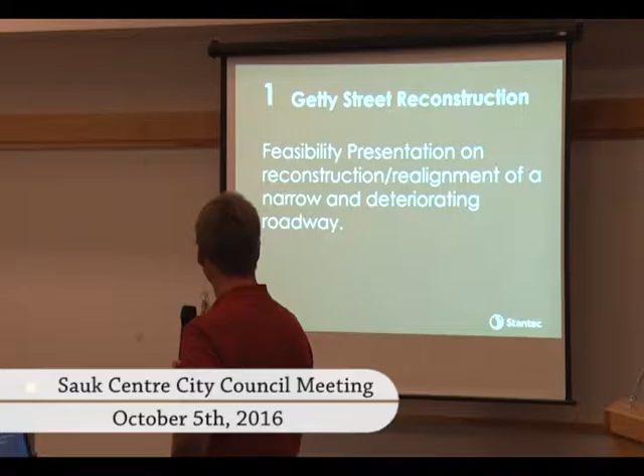This is for the Getty Street reconstruction. Purpose of this, a feasibility presentation for the reconstruction and realignment of currently a very narrow and deteriorating roadway. And as you all know, there is development potential that we think is fairly imminent that's going to occur in that area.

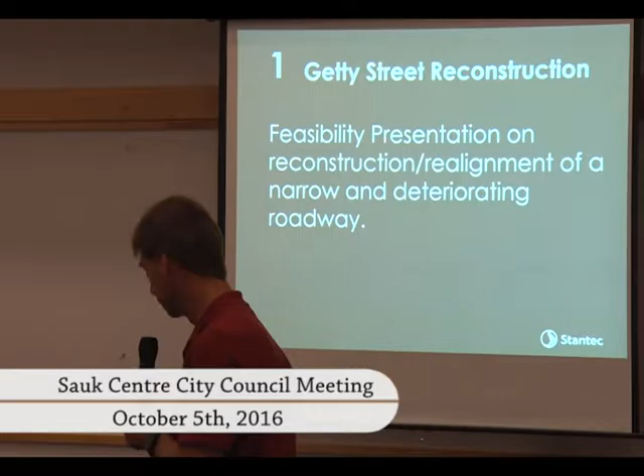You'll notice a very narrow roadway. It's a 24-foot wide bituminous roadway, has a rural section, doesn't have curb and gutter, those kinds of things, as you see here. You can notice that it's fairly well deteriorated, the pavement. This is down there at the corner looking to the east towards 71. Once again, it's still at 24 foot along through that area. You can see the condition of the pavement, it is deteriorating, rural section.

It's only 24 feet wide. It really will not support retail traffic loading, both from a weight issue of loading as well as number of vehicles as well.

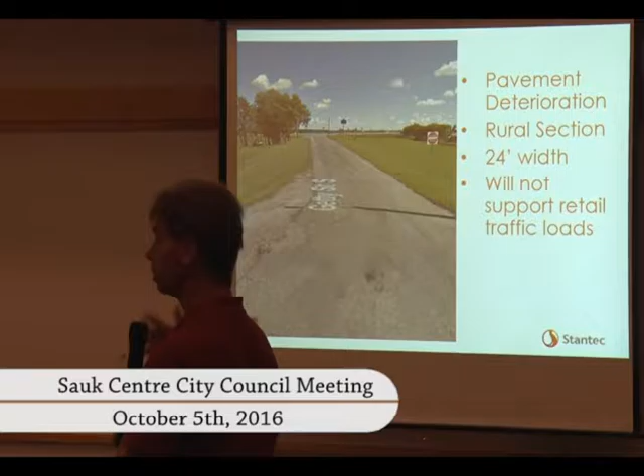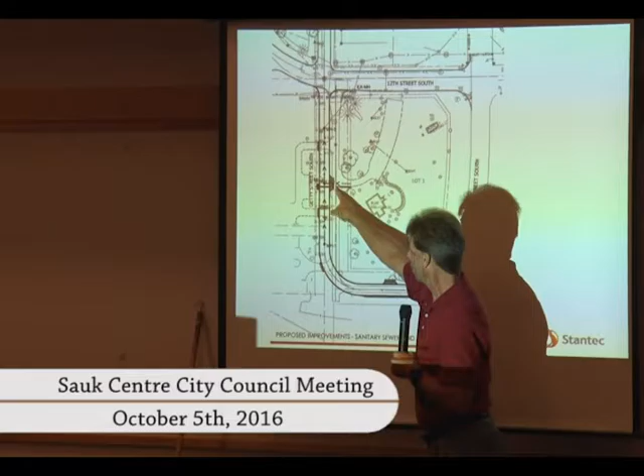What's being proposed for that area is such. What we have before you is a sanitary sewer and water main. It probably should just be sanitary sewer, because actually the water main is nothing but a service. I didn't grab my laser, so I'll have to point here. The only real major service is the one that would go into the developing property, which is now the interpretive center area. That's the only water main through here.

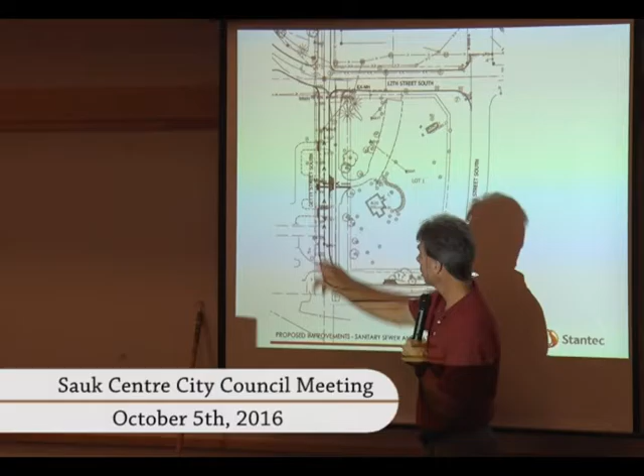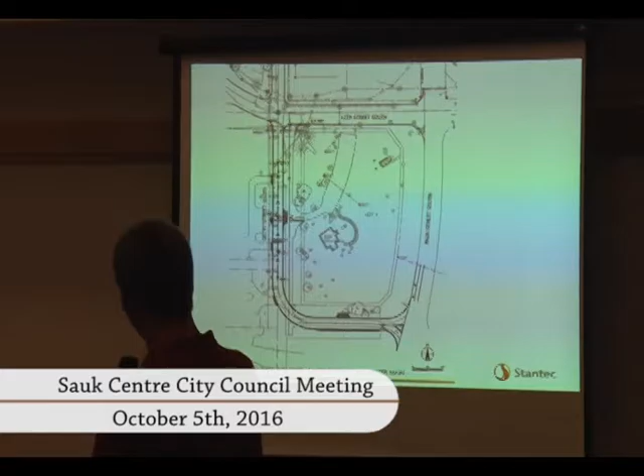The sanitary sewer just realigns. Currently, the water and the sewer is way over here in the boulevard area, on the West Boulevard. The sewer would be brought back and realigned and put down the center of the roadway. The PUC intends for the water main to stay where it's at. There'll only be some minor adjustments of gate valves and hydrants, and those kinds of things will be the only thing that would occur in those particular areas. The existing assisted living and the hotel would just have their services reconnected again.

These are the improvements for the street and storm sewer. I'll cover the storm sewer first - it's pretty minor. Storm sewer is only located way up on the north side, just a couple of catch basins that pick up water. All the street drainage starting at 71 goes all the way down from there. There's also an extension of a culvert to pick up the southwest corner ditch line of Beltline and Getty Street. That's really all there is with the storm sewer for this project.

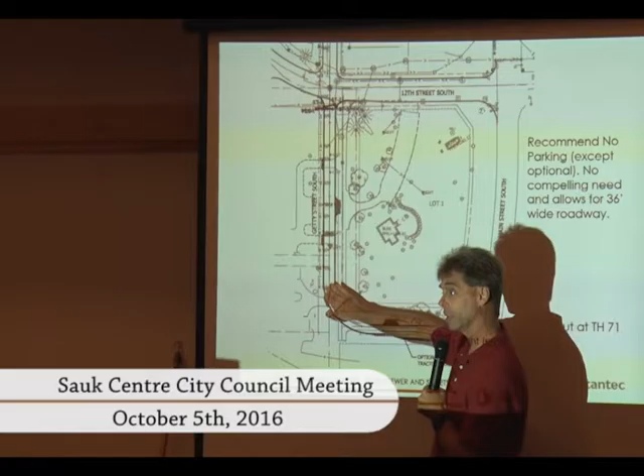As you can imagine, with the street moving - the street used to be right over through here, now it's going to be pushed all the way over - so there's going to be grading work to fill in that ditch and slope back into the existing properties on the west side. So there will be more extensive grading because of moving that over.

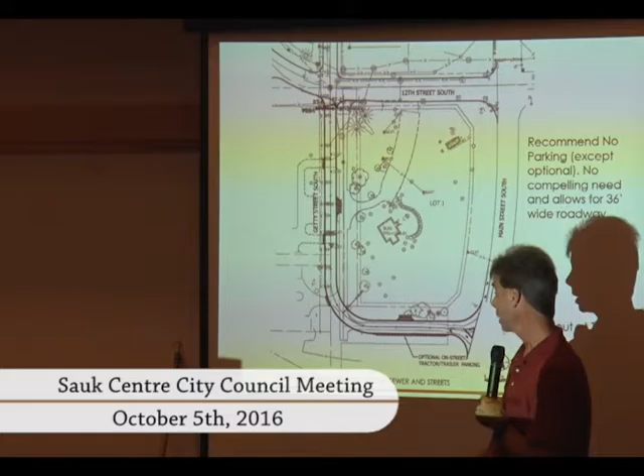This portion of the roadway is generally right on top of where it is now. The exception is that right now there's essentially a 90-degree corner down there that's been rounded off just from people driving over it, but a proper curve will be put into that area. This curve has a 125-foot radius, which would allow a full-size 67-foot semi-truck to drive through without being outside its lanes or jumping the curb. So it's a minimal radius to accomplish that.

Currently that's a one-way, correct? So it's a one-way through here. This is two-way on the north-south, and this is a one-way going out. So the plan would be to make that into a two-way.

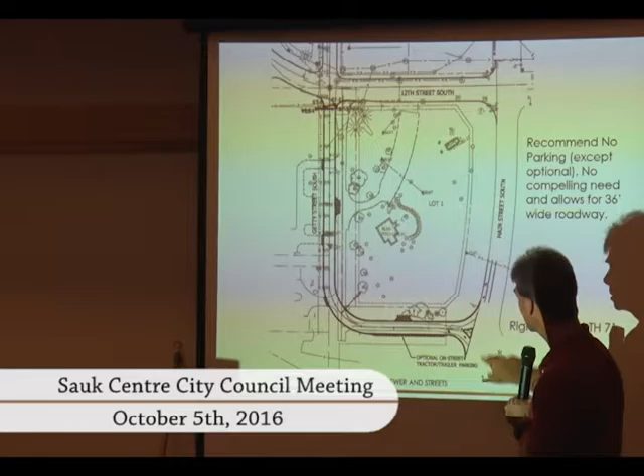With a turn off of 71 - correct, you're just a little ahead of me on this, but yes, what would change here is that this becomes a right-in, right-out. So you can only go from southbound to get in through here, and as you come out, you can only go southbound again. Currently the movements allowed are coming in from the north, coming in from the south, and you can actually come straight across from the off-ramp. That would go away, and this would go away too, so you can only come in and out - what you gain is that out movement. This will be as much as MnDOT's correspondence thus far would allow us to do with a right-in, right-out. I believe their strong preference is to have nothing go through there, but the correspondence suggests a right-in, right-out would be an acceptable alternative. So that's what's being put forward.

This would be back to an urban section with concrete curb and gutter and bituminous roadway, just like our other roads. This is a 36-foot wide roadway. One recommendation is to keep it that narrower width but mark it as no parking, since there isn't really a need for parking in this area - there's plenty of parking at the assisted living facility, the hotel has plenty of its own parking, and whatever goes in here will have internal parking too. Allowing parking just makes the roads wider and costs more money. It is narrower than Getty to the north, which was about 40 feet wide, so it's wider to the north. If we widen it, then parking becomes an issue.

The one issue we have is that hotel patrons, semi-trucks, usually end up parking right down off of this area. Now, technically, that's onto MnDOT's right-of-way.

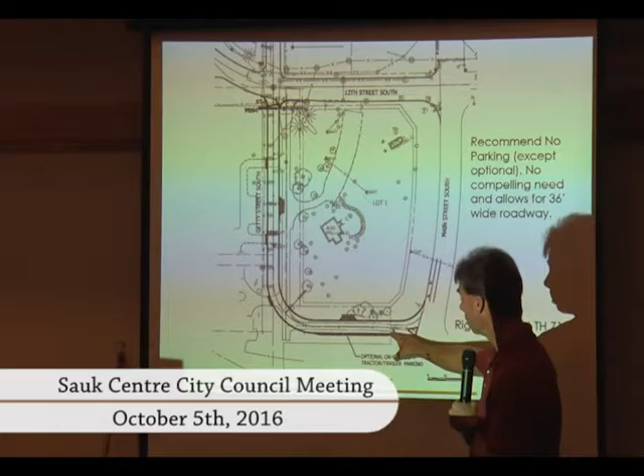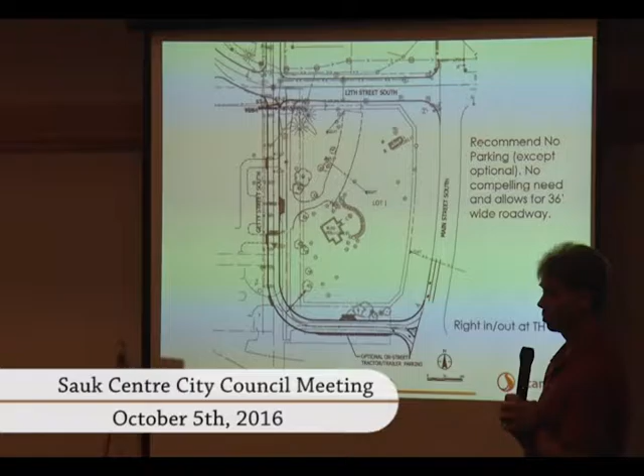One thing I've struggled with is that if we were to make something through here that encourages people to park through there, we're really encouraging someone to park on somebody else's property. One option I've developed is whether we'd do a bump out, maybe 2 to 4 foot wide, widening the street, curb and gutter through here. What's drawn here would accommodate 2 semis parking, while still allowing a full driving lane past it, so we're not narrowing the street's driving width.

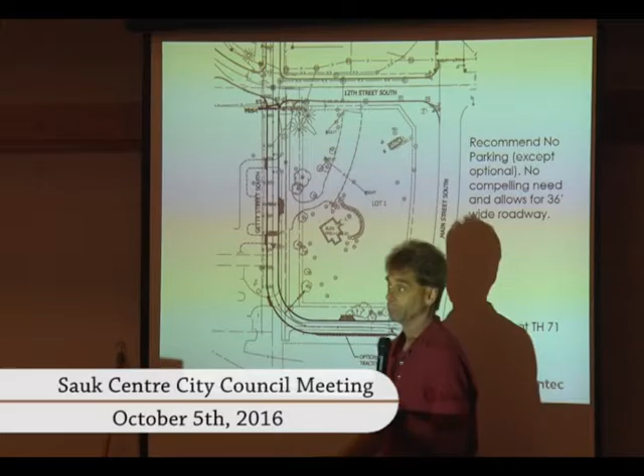Other than that, you could say no, we're not going to have any parking there—they'll have to park on their property someplace. There's some gravel parking area to the west. If you've been to the hotel, whether a semi can get in there and turn around might be questionable. But that's an issue before us, and we can talk about it and get some feedback tonight. That really would be a design issue if you chose to go forward—what direction you'd wish to go with the parking issue here.

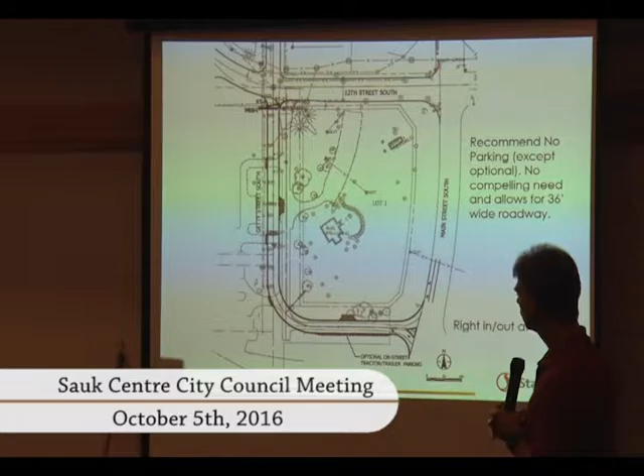The project costs are estimated at just over $337,000 total. You see the breakdown for sanitary sewer, storm services, and streets. The vast majority is the streets at $269,000.

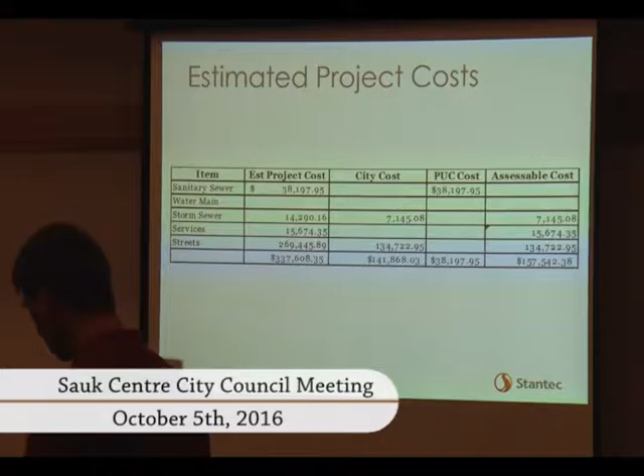The city cost is based on a 50-50 split of the storm sewer and the streets—the city cost is $141,000. The PUC cost is for the sanitary sewer; they pay for that portion. The assessable costs are shown on the far right, and that's the dollars that would ultimately be assessed for the adjoining property owners.

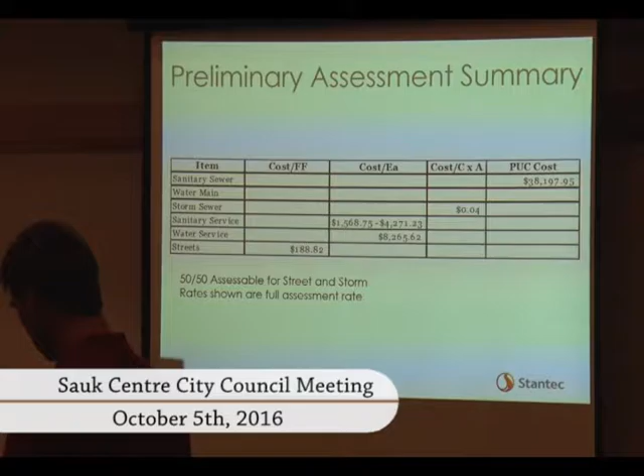The rates you see here are full assessment rates, so the adjacent resident would essentially pay half of those rates for the street and storm sewer. I'll show you what those preliminary assessments would look like. There are only 4 property owners—the top one is the assisted living facility, the next 2 are the hotel, and then the city is essentially the developable parcel at this stage. The discounts are figured in, so you can see the totals for each one with the discounts applied at this stage of the cost estimates.

So with that, I will entertain any questions you may have at this stage.

I suppose that parking, the question of parking for the semis for the motel up there, I suppose they'd have to petition their neighbors for that gravel parking. To the south is MnDOT right of way, so I doubt MnDOT would give them authority to put a parking lot in there. To the west, if they did something out back, that would have to be worked out with the adjacent property owner. It's a larger parcel there, but they would have to work something out with them. That could be done, but there just isn't a real good solution.

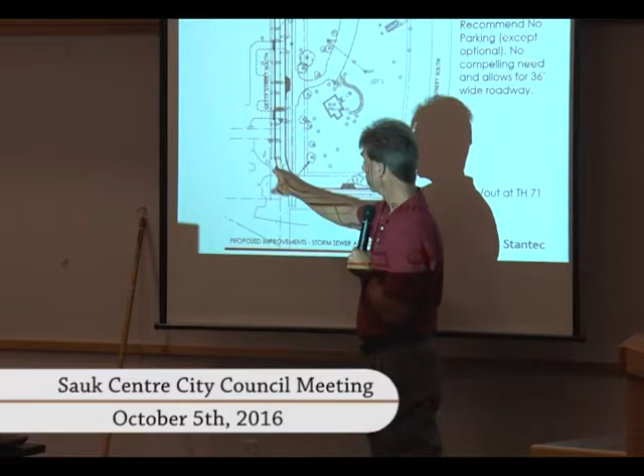It's down there, and their parking is angled this way, and it's also angled on the other building this way, which is kind of odd because it doesn't really facilitate flow parking, but that's the way it's currently striped.

But right now, it looks like the trucks are probably parking on MnDOT property anyway. Yeah, they absolutely are now, so it's actually paved a bit. You can kind of see the little T that's paved through it, and the rest of it's just kind of gravel and grass, just back where they park.

But you can see that with the road being moved over, it's really easy now because they can just drive in and back through there. Well, now that becomes a little more problematic because you're sort of about a third of the way through the curve, so it doesn't work out quite as well in that same location.

Plus, presumably, if we have retail here, we're going to have a little more traffic through there. Turning movements of that type could be problematic. I don't know if we'd want vehicles trying to make those kinds of maneuvers when there's more traffic on that road.

Well, I think with the bump out, we don't know what the property is going to look like after the fact - what's their parking lot going to look like, where's their turn-ins, their turnouts, and putting a semi even 4 or 5 feet into the road... I don't know. Now, what we currently have shows...

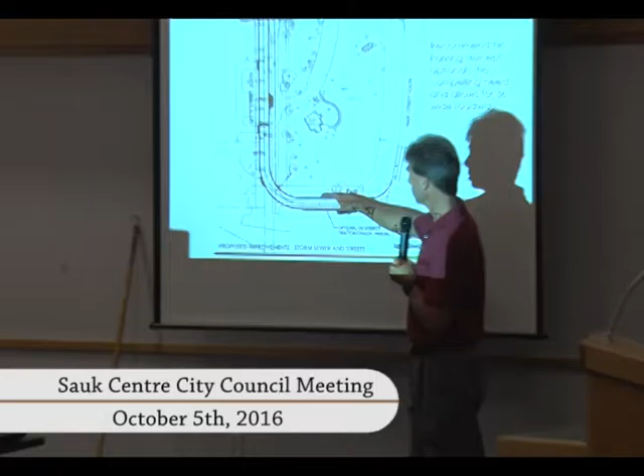...entrances into this property. This is only from a very preliminary sketch provided from them, so likely that's going to change in some way, shape, or form, I would imagine. We hope to get something reasonably soon from them. They are actually, I understand - correct me if I'm wrong, Vicki - working on some layout now. They're actively working on something. I don't know how long that will take, but sometime soon.

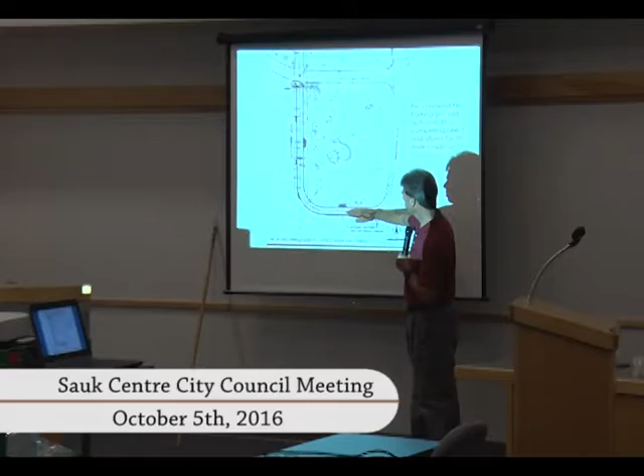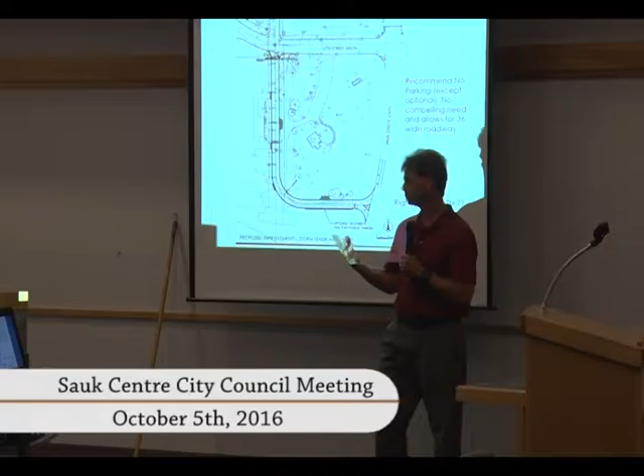I should also point out that these trees, as you probably recall, the land really drops off through here. So with our grading, we only have a 5-foot boulevard that we're providing, then going down at a 4-to-1 slope. These trees would all end up going. None of them are real great trees, but they'd be removed. Most likely with the development they'd be gone anyway because they'd have to fill in through there. So those are the only ones that would be tree removal associated with the project.

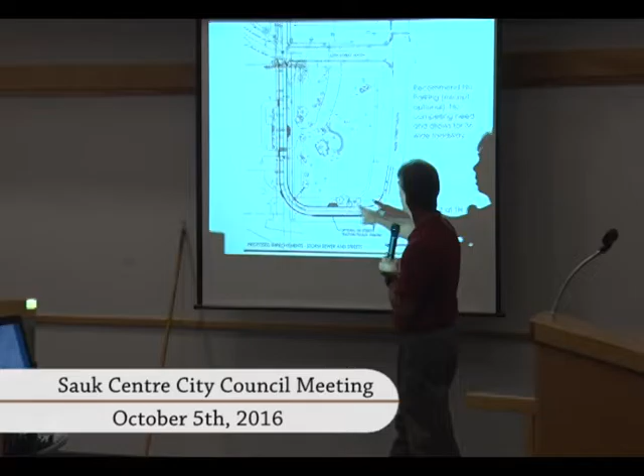So vehicles traveling north on Getty Street, at that exit, can they turn right or left, or is that limited too? On 71, when they head north out to 12th Street, can they turn right or left there? Yes, it's open. That would be a full interchange there. There's no lights there or anything, but it would be just like any other intersection we have. It's a wild one. Interesting, thank you.